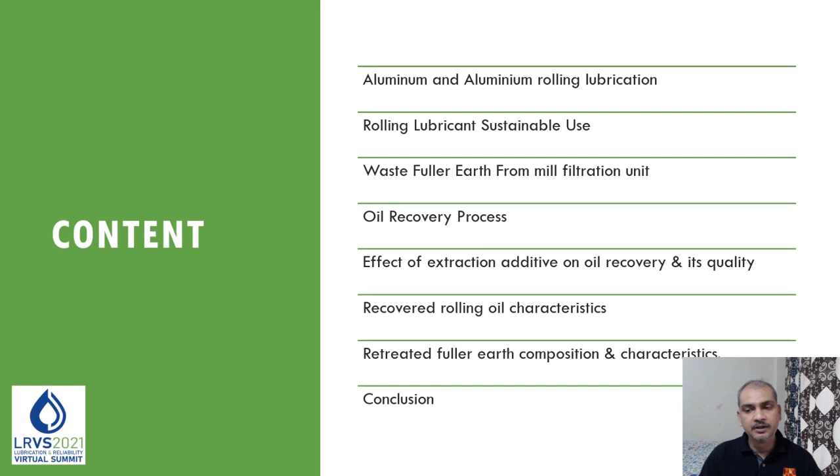So let's start with the paper. As all of you know, the use of aluminum has increased in many various applications over time. It is the second highest metal used after steel. Aluminum finds more than 3,000 applications in various industries.

It offers very good tensile strength, castability, formability, good chemical resistance, and various surface treatment processes. It has very good electrical and thermal conductivity. Along with that, aluminum is lightweight and it can be recycled infinitely. So that makes it the metal of choice for various applications. A few of the applications are like transportation, structural components, packaging, electronics, and machine components.

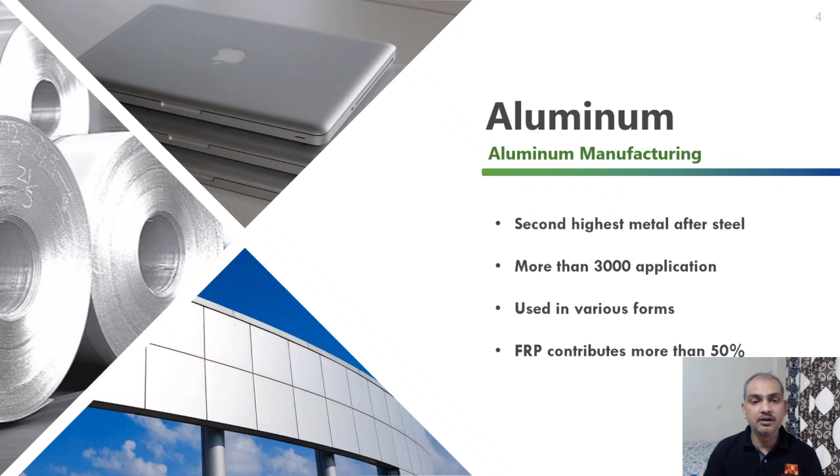Aluminum is used in various forms like casted material, extruded profiles, or flat roll products. Flat roll products contribute more than 50% of aluminum consumption in the industry, and hence it is very important. In the last slide, we have seen the aluminum consumption in flat rolled product form is more than 50%, and it makes a very important aspect when it comes to aluminum manufacturing.

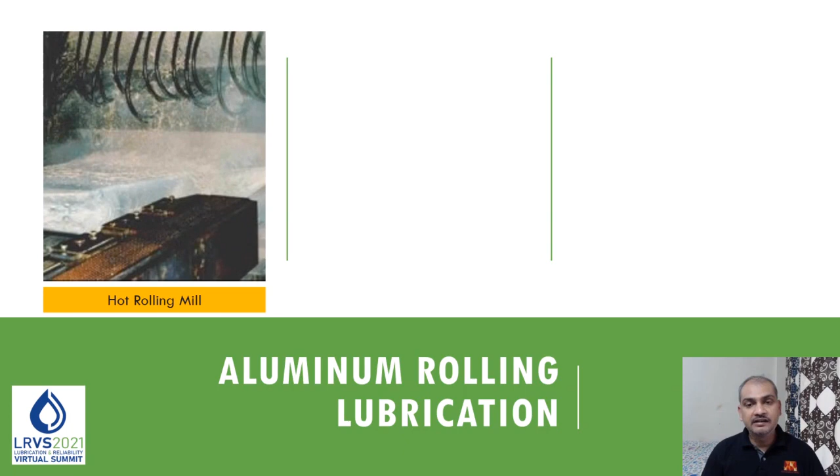And if you see, lubrication is an integral part of the flat rolled product segment. FRP manufacturing can be categorized into hot rolling, first where ingot is rolled into aluminum sheet of particular thickness. Then this particular sheet is further rolled in a cold rolling mill to reduce the thickness, and for applications like foil or pharmaceutical industry, it is further rolled in rolling mills known as foil rolling mills. Each of these processes uses various different lubricants in the rolling process.

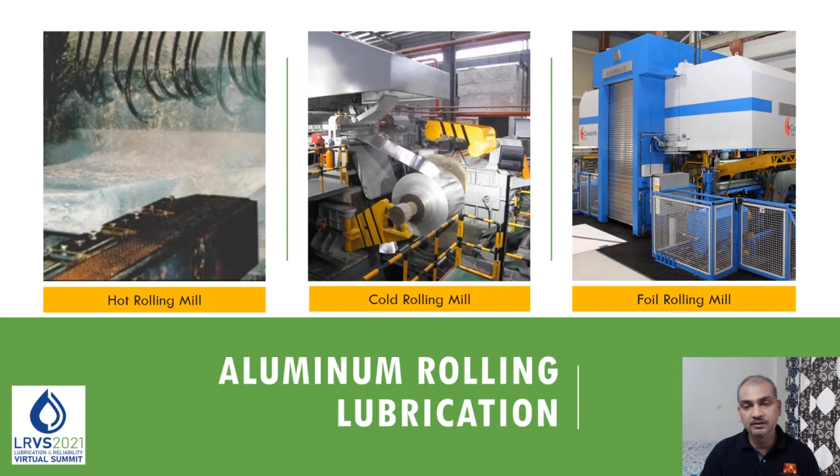Hot rolling process uses oil in water emulsion as a lubricant, while cold rolling and foil rolling processes use mineral oil along with fatty additives as a lubricant. In all these processes, lubricant used in the mills undergoes filtration continuously. This is to remove the debris and aluminum fines generated during rolling applications.

In hot rolling mill, the filtration happens only through filter media, which is nothing but polypropylene or polyester paper through which the emulsion is passing. Whereas in case of foil mill or cold mill, filtration happens through a multi-stack plate filtration unit.

So here on filter media of polypropylene or polyester, the mixture of diatomaceous earth and fuller earth is used as a bed, through which the filtration happens. So once the DEFE bed gets exhausted, it is discarded and a new bed of DEFE is made on the horizontal plate filter for cold mill and foil mill filtrations.

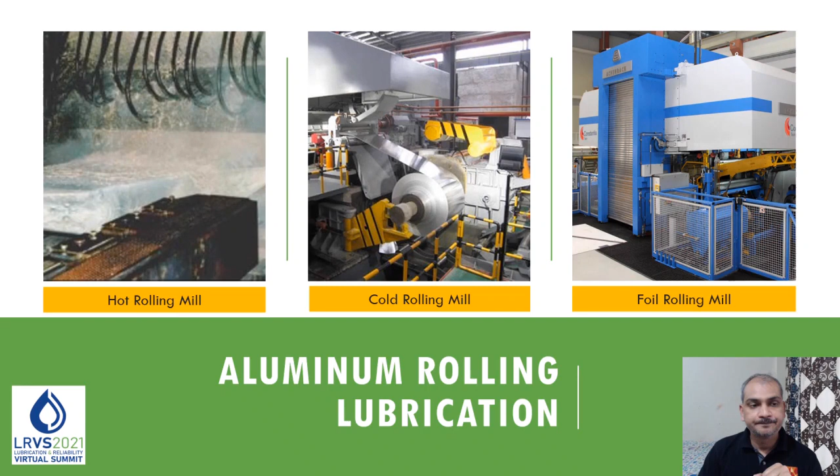In an earlier slide, we have seen the process of manufacturing flat rolled products of aluminium. Here in this slide, we will look into rolling lubricant and its sustainable use in rolling mills.

If we see the cold rolling mill or foil rolling mill, there are mainly two reasons oil is getting lost: evaporation loss and oil carryover. Evaporation loss is reduced by putting oil recovery units at the exhaust, and oil carryover is controlled by air knives and appropriate mechanisms at the mill.

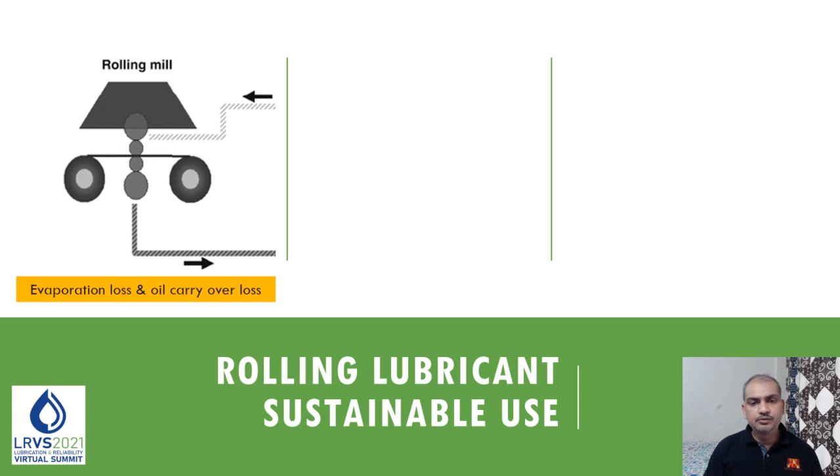When it comes to heavier oil leakages, the oil reservoirs get contaminated, which needs to be controlled by leak detection dyes in heavier oils. Contaminated oil is recycled back by doing vacuum evaporation, and heavier oils are removed from that, with some oil loss happening in vacuum distillation.

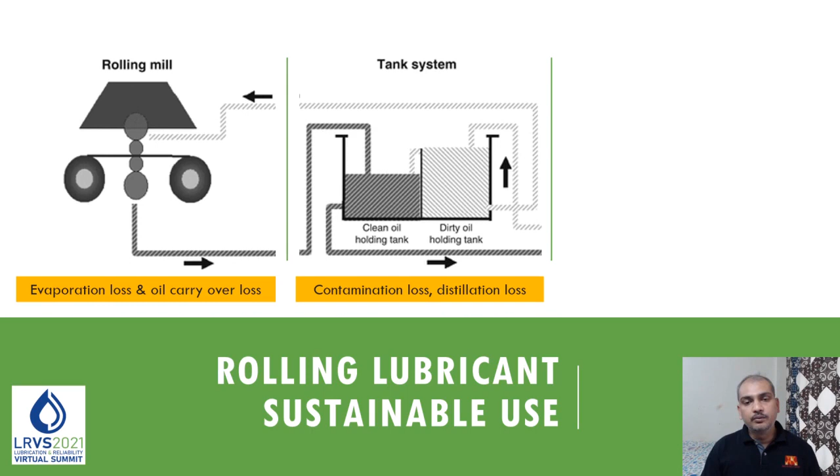When it comes to the horizontal plate filter, oil is lost with waste fuller earth. The waste fuller earth contains 35 to 40% of rolling oil, and currently there is no process by which this oil can be recovered. On a small single stand cold mill, 35 to 40 metric tons of waste fuller earth is generated, resulting in 10 metric tons of oil loss. In terms of money, the average loss is 25 to 30,000 US dollars per annum.

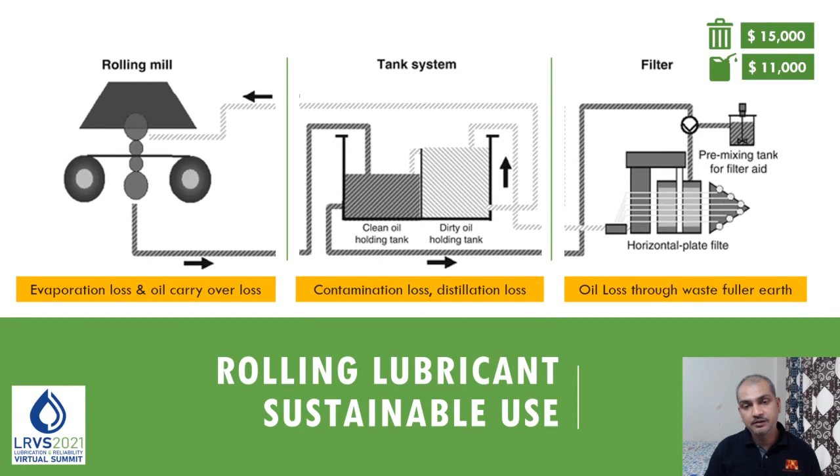So to solve this problem, we have developed an oil recovery process from waste fuller earth, and in this paper we will see the process of oil recovery from waste fuller earth for sustainable use of this particular lubricant.

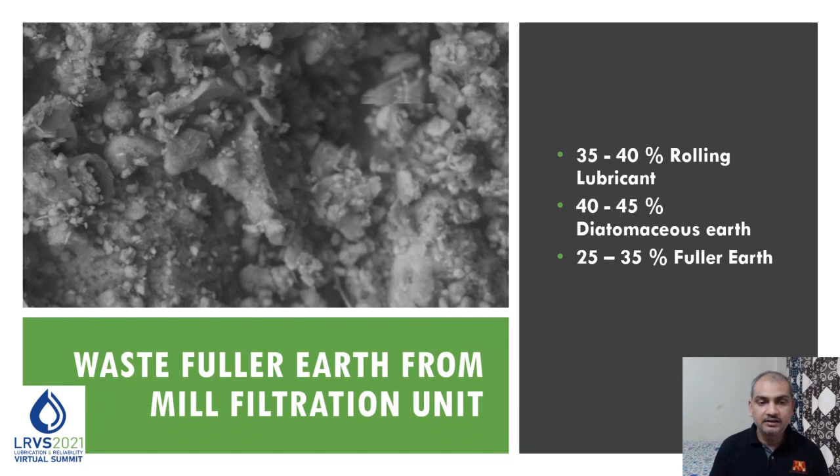In this slide, let's see the composition of waste fuller earth, which is generated at the horizontal plate filter in cold mills or foil mills. As we have already seen, it contains 35 to 40% rolling lubricant. It also contains 40 to 45% diatomaceous earth, 25 to 35% fuller earth, and less than 1% aluminum fines and debris. Now let's see the process of oil recovery from waste fuller earth, which we have developed in-house.

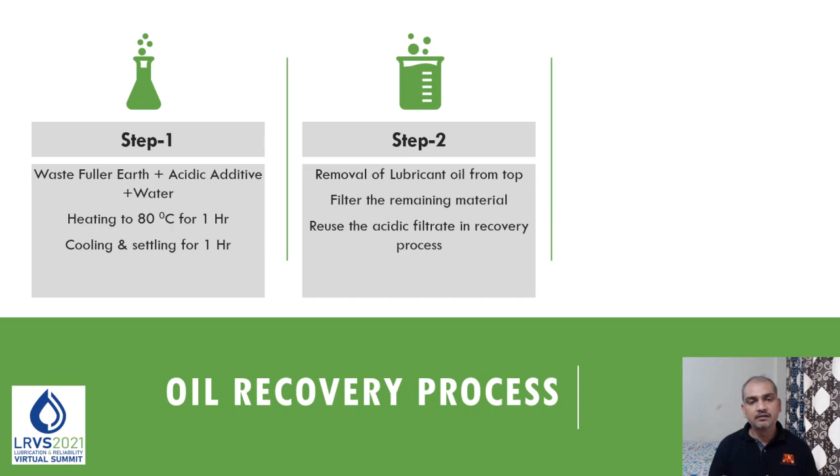In step one, we mix waste fuller earth, water and a proprietary acidic additive together. The mixture is heated to 80 degrees Celsius for 1 hour, then cooled down to room temperature. In step two, the oil that has been recovered and is floating on water is extracted or removed, and the remaining mixture is passed through a filter press.

The acidic water from the filter press is used again in step number one. In step three, the recovered oil from step two is first pre-treated and then vacuum distilled, and the fuller earth recovered in the filter press is dried and regenerated at 775 degrees Celsius for reuse.

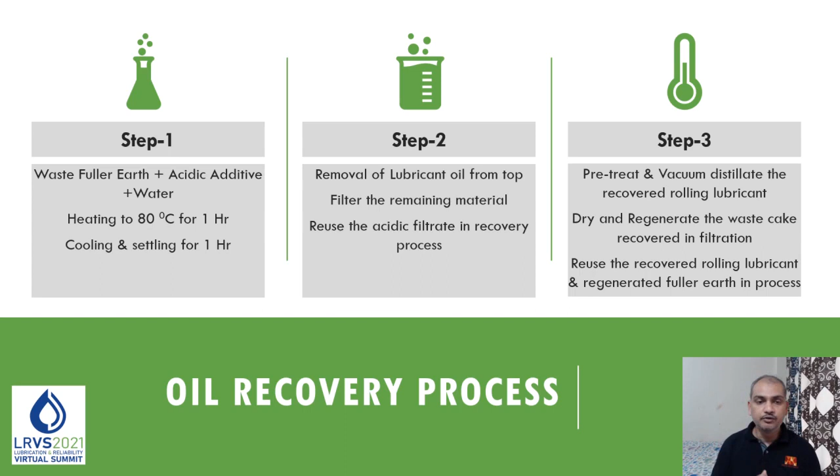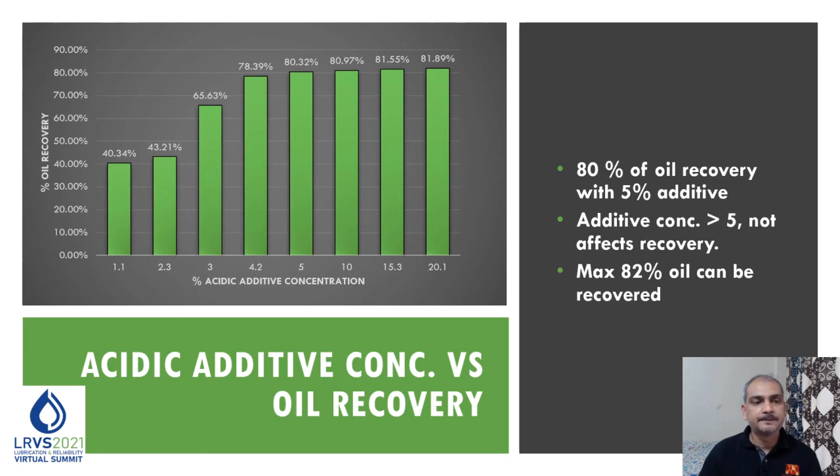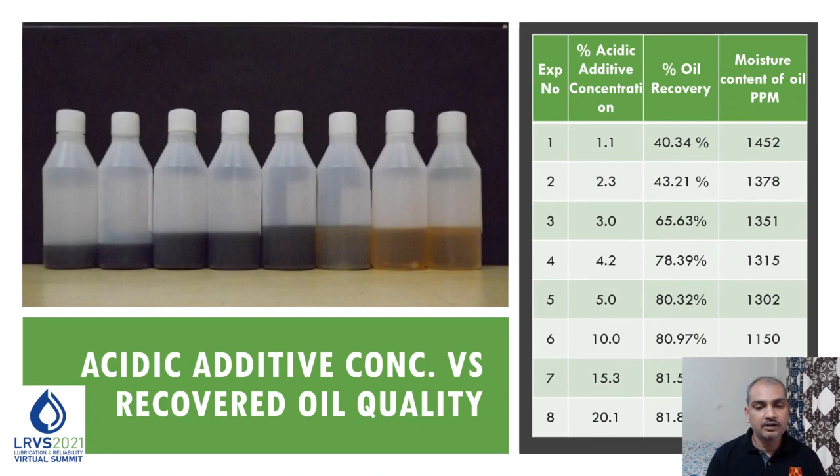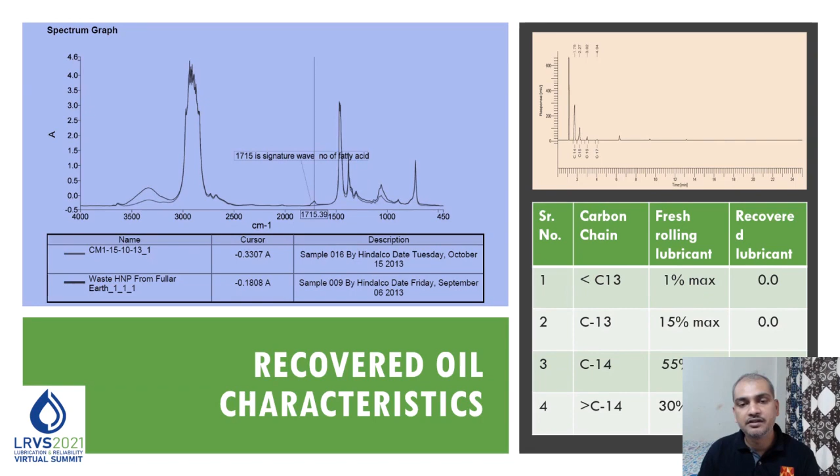Now let's see the effect of proprietary additive on recovered fuller earth. As we increase the concentration of additive, the color of fuller earth improves.

Waste fuller earth contains approximately 30% to 40% oil, giving it a calorific value of 2800. But when we extract the oil from waste fuller earth, calorific value reduces to 400 plus minus 20 calories per gram. With recovered oil, we can do two things.

One, discard it as non-hazardous waste, and second, retreat or regenerate the waste fuller earth at 775 degrees Celsius and reuse it in the system.

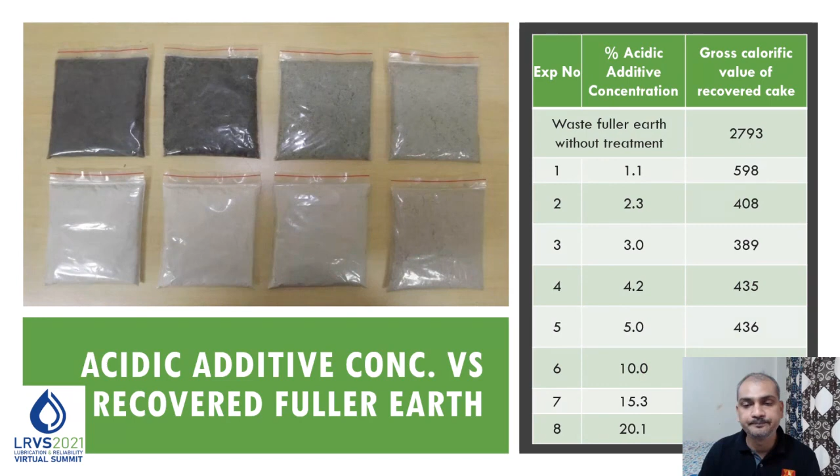Now let's see the composition of recovered and regenerated fuller earth. If you see the picture, there is good porosity in retreated waste fuller earth. Looking at the composition, elements like magnesium and calcium are not present in retreated filter earth.

This is because these elements are forming salts with the additive and getting removed in water. But overall, there is no major difference in composition, and that's why we can reuse the regenerated fuller earth back in the filtration units.

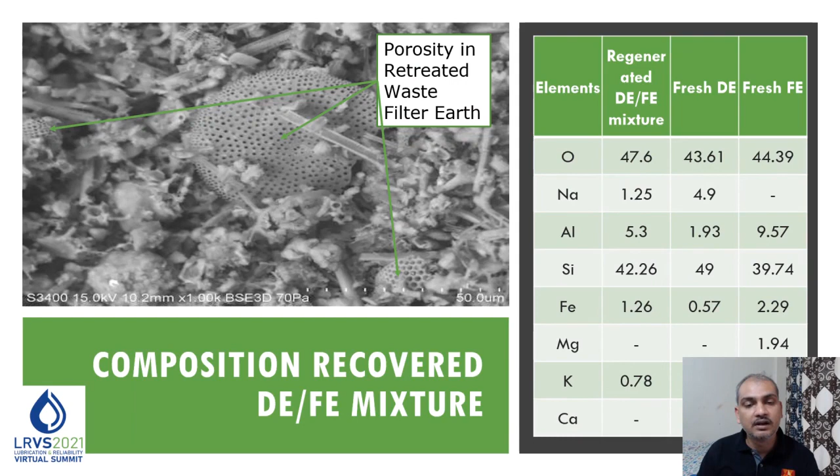Now let's see the filterability of retreated fuller earth. The waste fuller earth which is retreated and regenerated has a flow rate of 0.052, as against 0.027 for fresh material. This is because of the opening of pores in the diatomaceous earth by the treatment.

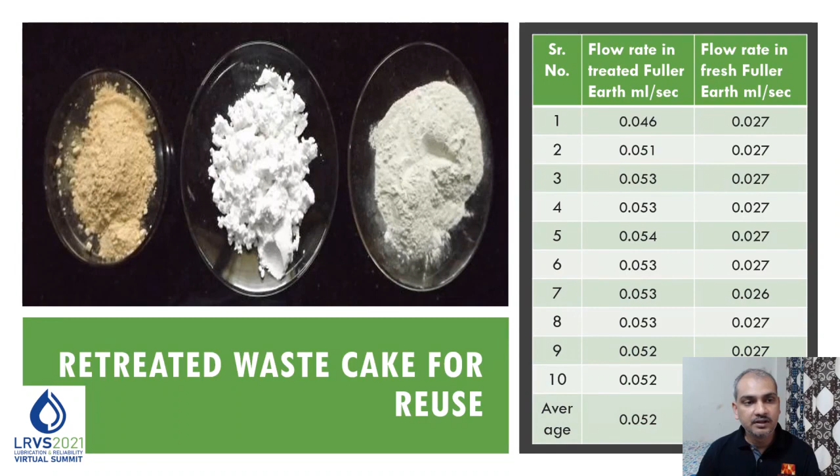Now let's see the conclusion of the paper. From this study, we can conclude that cold rolling lubricant can be effectively recovered. Up to 80% of rolling oil recovery can be achieved with 5% proprietary additive concentration.

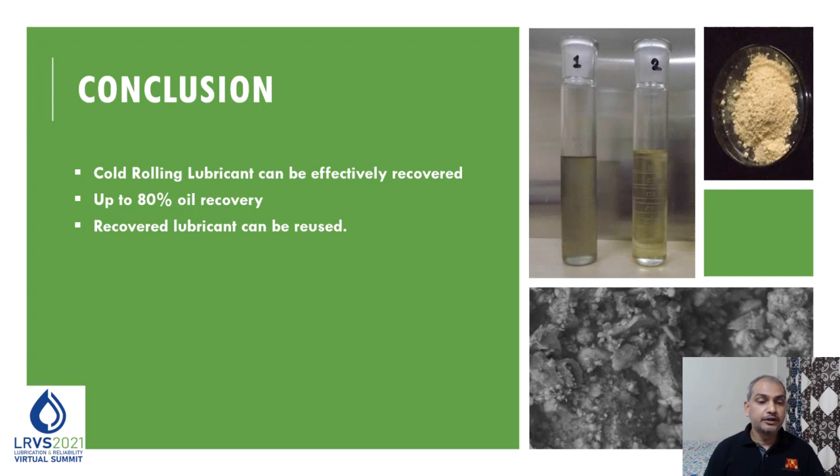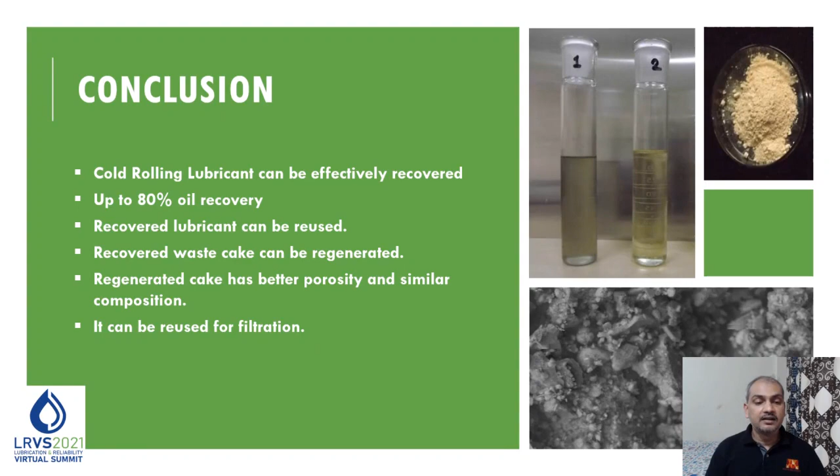The quality of rolling lubricant is appropriate for its reuse. The waste cake, which is regenerated, can also be reused for filtration. Regenerated cake has better porosity and similar composition, and hence it can be reused again in the filtration unit.

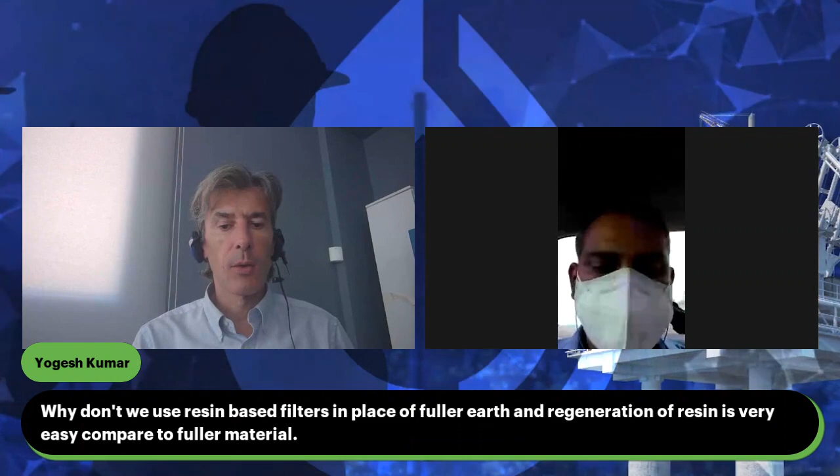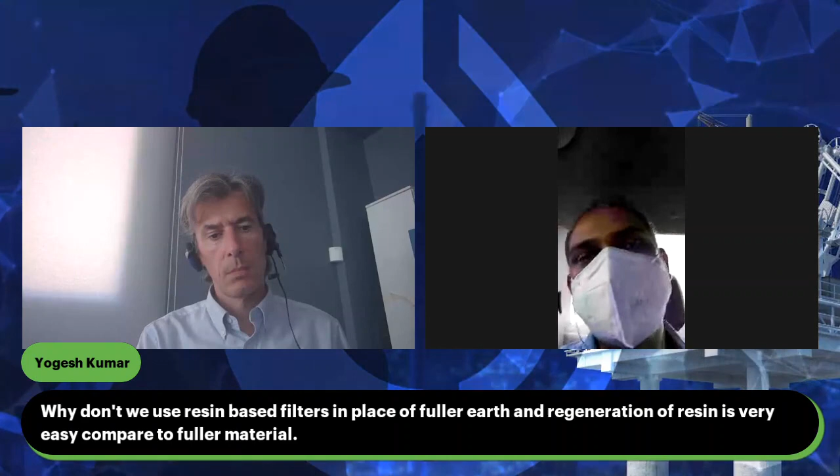Resins are normally used to absorb contaminants in ionic form - ions like plus-plus or minus-minus get absorbed on these resins, that's how they work. Whereas in the aluminium industry, the fuller's earth we're using right now mostly captures aluminium fines and aluminium oxides, which are not particularly ions. So I'm very doubtful about using resins for this filtration purpose - that needs to be checked. It's a really interesting aspect that Yogesh brought to the table. I need to check if resins are really useful in recovering aluminium fines and oxides from rolling oil. If it's possible, then as Yogesh said, it would be very easy to recover the fines or waste oil from resins. Exactly.